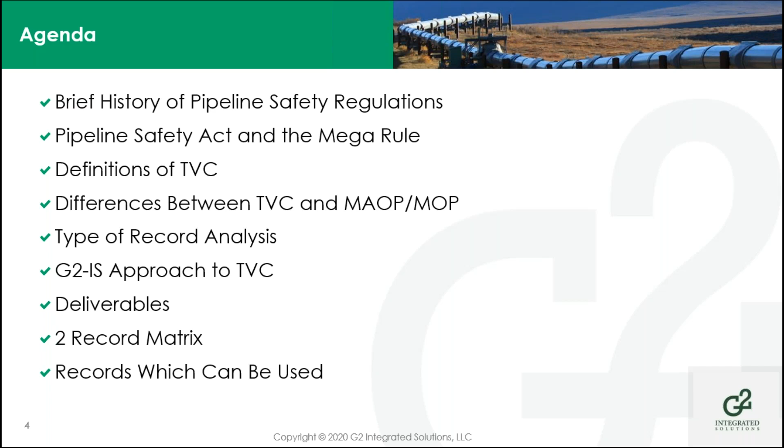So, want to go over our agenda. We're going to talk about a very brief history of the pipeline safety regulations and why we're where we're at, the Pipeline Safety Act and the mega rule. We're going to talk about TVC, and those differences between that and MAOP, MOP. We're going to talk about the different types of record analysis. Then we're going to talk about our approach to TVC, what a deliverable package would look like. Ultimately, we want to talk about a two-record matrix and why G2 does what they do, and then we'll talk about which records ultimately can be used to generate a TVC type of document.

And I'm not going to read everything, but we will go over it. Most people are familiar somewhat with why we got where we've got, and most people are familiar with the mega rule, but there are some interesting bits of history that I did want to go over.

The Natural Gas Pipeline Safety Act was adopted in '68 as a result of several things, but the last thing was an explosion on a gas leak from a cast iron main outside of Marting Arms, where the report showed that there were over 55 gas leaks, 7 of which were exceptionally large in the days just before the explosion.

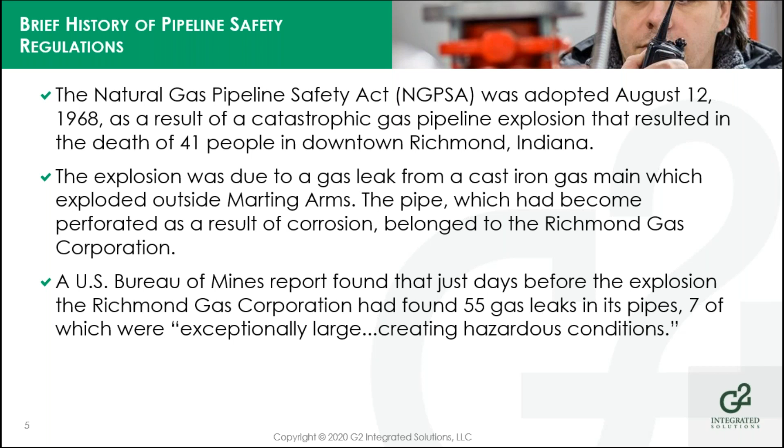In November of '68, the OPS issued the new regulations for gas pipelines, Part 190, which ultimately evolved into 192, 191, and 195. In '69, Part 195, the liquid lines, hazardous liquids by pipeline, was adopted. In '70, they adopted Part 192.

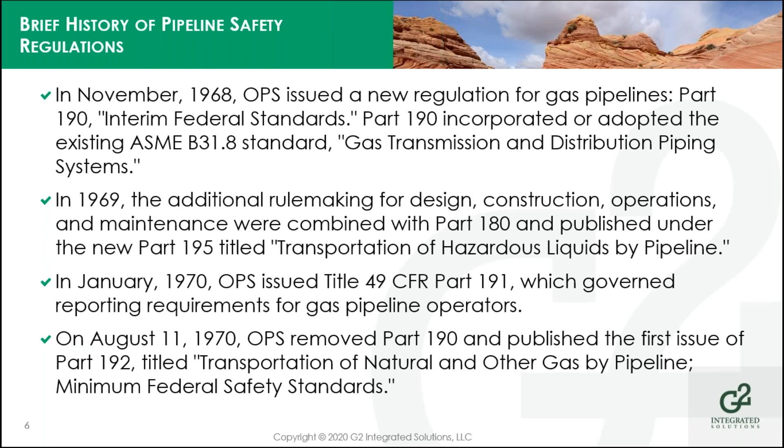And as we went from 1970, which was when the rules were initially promulgated, there were several things that happened, but ultimately, the defining moment for a lot of us, at least within the TVC world, was the San Bruno failure, where a 30-inch line ruptured inside the residential area of San Bruno. It killed 8 people, released almost 50 million in natural gas, and destroyed 37 homes. Fire destroyed 37 homes and damaged 18.

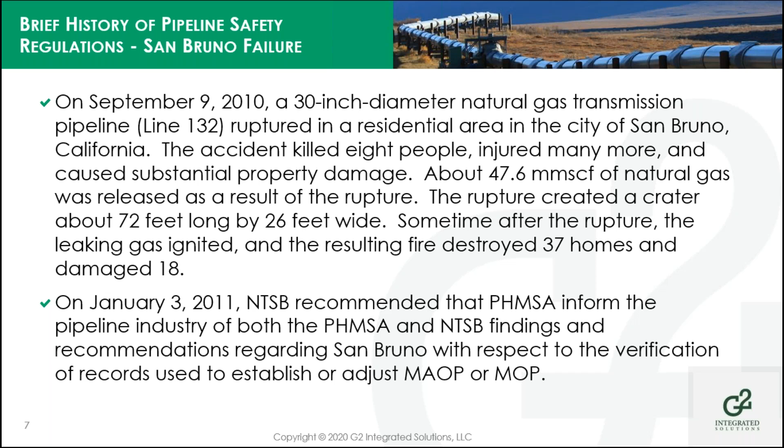So shortly after that, the NTSB recommended that PHMSA inform the pipeline industry of both the findings from NTSB and PHMSA and those recommendations regarding San Bruno.

And then with respect to the portion that failed, PG&E used available design, construction, inspection, testing, and other related records to calculate MAOP, which is exactly what we wanted to do. I mean, that was within the rule. That's the extent of what you're trying to do.

But what they found was that the records were incomplete, the records were wrong. For instance, there were areas on the alignment sheets that marked pipe as seamless that actually was shown to have a longitudinal seam welded pipe.

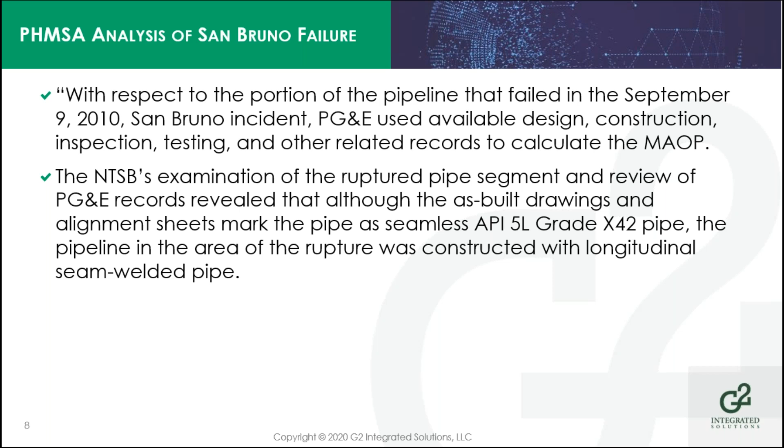Additionally, the pipe segment had 5 sections of pipe, some of which were short pieces, different types of seam welds, and it was unknown to PG&E and the design guys who were calculating the MAOP. They were using either wrong information or unknown information.

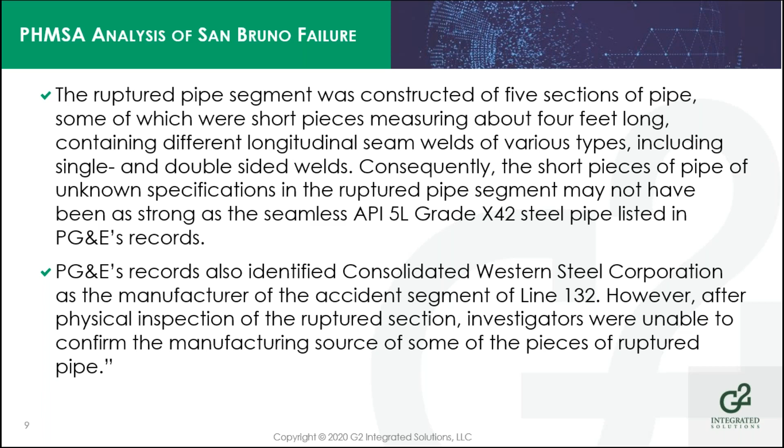And then the last thing is, the manufacturer of the pipe was shown, but they were unable to confirm that source.

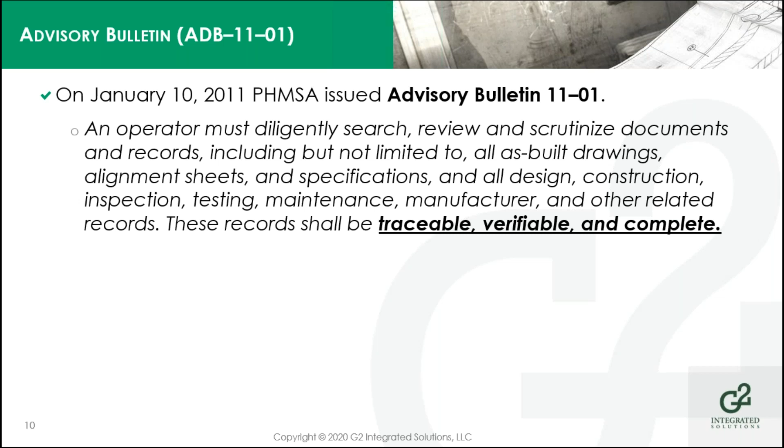So on January 10th of 2011, Advisory Bulletin 11-01 was issued, and particularly what it said is you've got to search for records and that your records should be traceable, verifiable, complete. This is the first time that term actually officially appeared in the documents.

Later on, because they didn't really define what TVC meant, they followed it up with Advisory Bulletin 2012-06, which gave the definitions of what traceable, verifiable, and complete really mean. It also stated that within the gas pipeline world, these guidance documents were required for class 3, class 4, and anything in an HCA.

Later on, as it evolved, because of the disasters and some other things that happened, the 2011 Pipeline Safety Act required the Secretary of Transportation to require the verification of records. Over several years, it's known as the mega rule. It took between administrations, many public meetings, and cussing and discussing at the highest levels of PHMSA and a few other organizations.

In October of 2019, the mega rule, at least with regards to traceable, verifiable, and complete within 192, were finally issued.

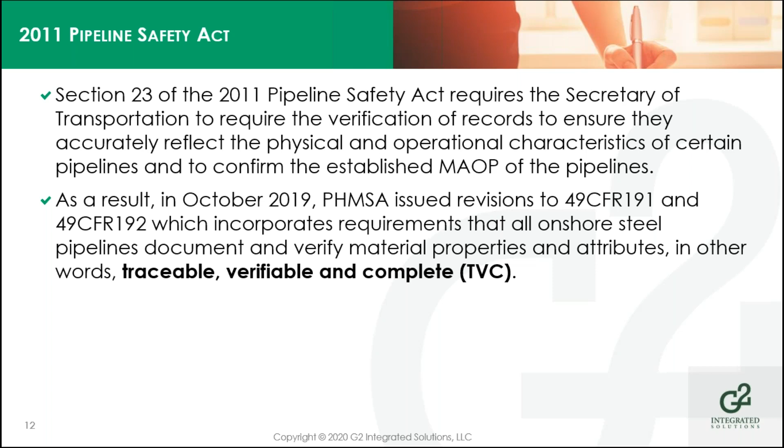Some of those sections that were part of the new mega rule that reference TVC are 67, 127, but the primary two are 607, which is where the TVC information specifically comes into play, and 624 comes into play if you can't find enough TVC documents to validate your pipeline. You will have to come in and reconfirm all your MAOPs on all your lines that you can't do TVC records on. So that's a pretty significant code section as well.

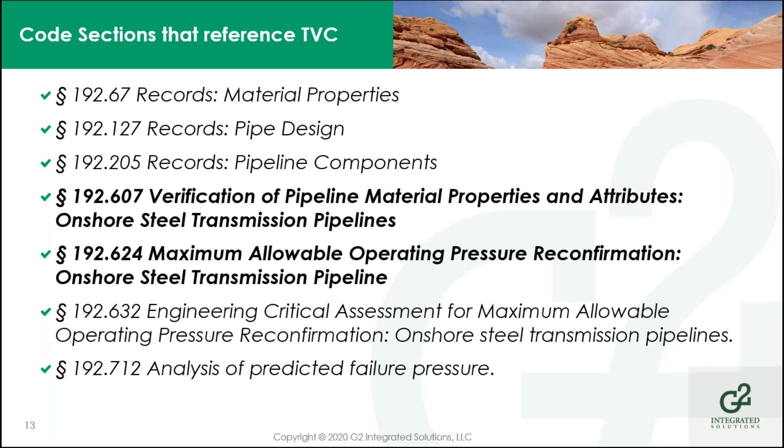In 127, it says if an operator does not have records to establish the MAOP, then you're going to be tied into 624.

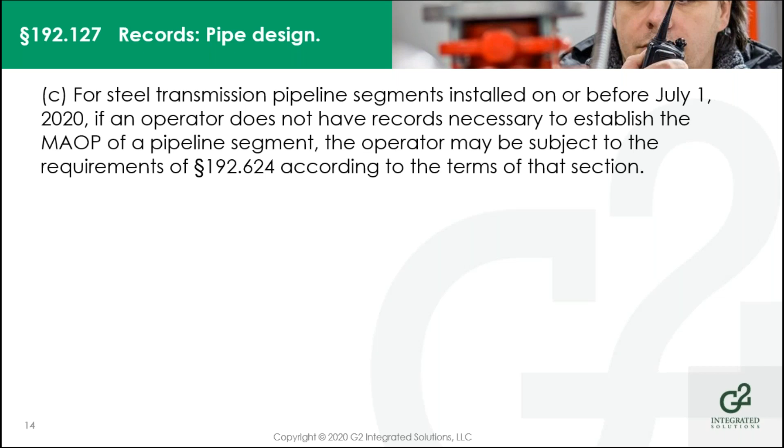607 says that you must document and verify your material properties and attributes. Those records have to be maintained for the life of the pipeline, and they have to be traceable, verifiable, and complete.

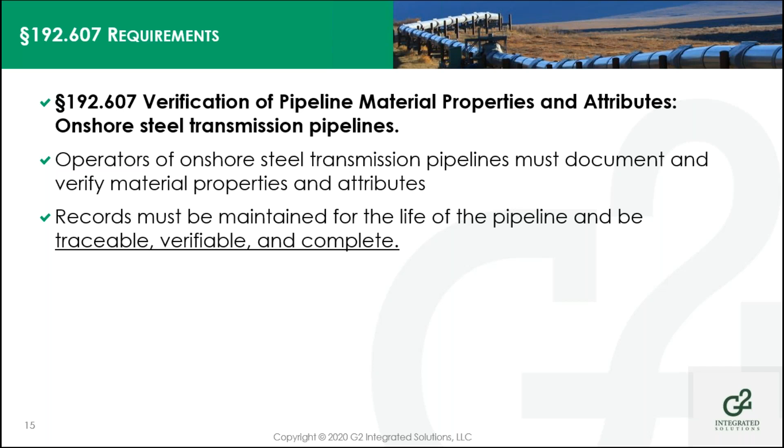Within 607, the 4 attributes that we do use to calculate MAOP are diameter, wall thickness, seam type, and grade. But now they've added some additional requirements, which is ultimate tensile strength. You've got to have your pressure ratings for your valves and flanges. And in instances, you're going to have a Charpy V-notch as well within your record sets.

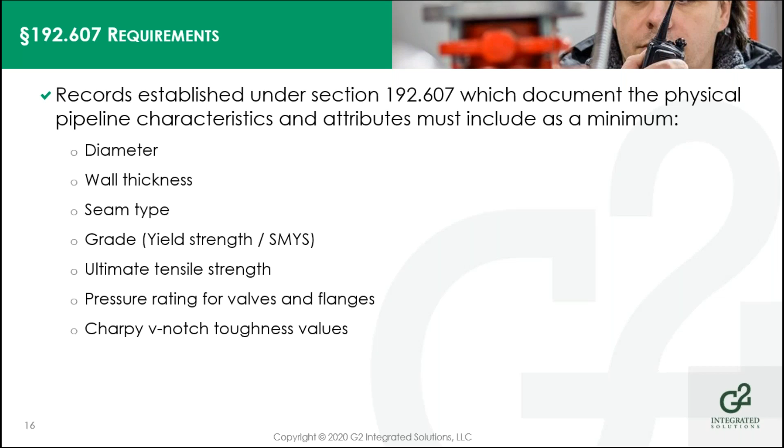A large part of all this information is available on an MTR, but an MTR by itself, while a really good record, is not an all-be-all record.

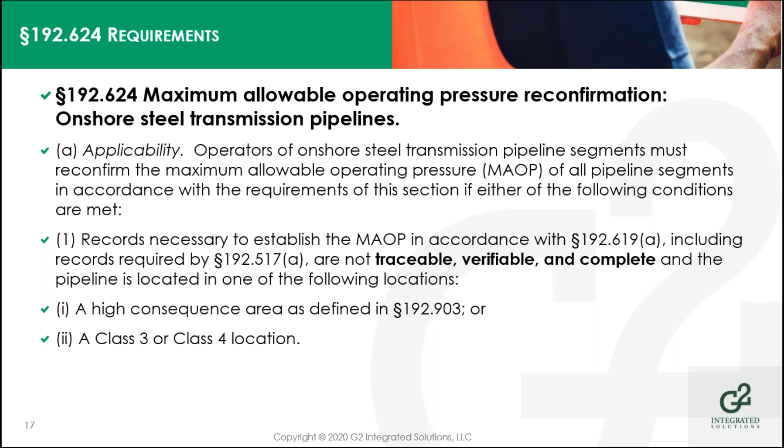624 requires that if you don't have traceable, verifiable, and complete records within a high consequence area or class 3 or 4, you do have to go in there and reconfirm all your MAOPs. And this is where they've also added the moderate consequence area, which was a new area per the mega rule, and most of you guys are already aware of what the MCAs are.

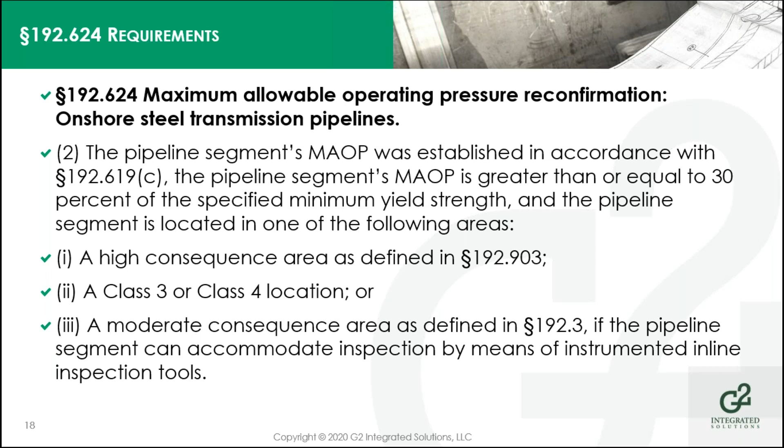Traceable records are those which can be linked to the original information about the pipeline, segment, or facility. They would include such things as mill test records, purchase records, as-built documentation, which would indicate the yield strength, the seam type, all the 4 attributes.

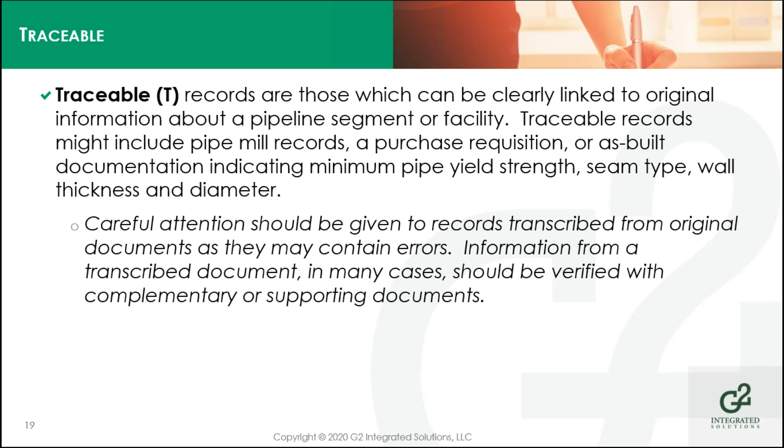And they did have a caveat here that you want to be careful. You've got to pay careful attention to those records that were transcribed from these original documents, because they might contain errors. They've added in that information from that transcribed document should be verified with the complementary supporting documents. They didn't use the word shall, they used the word should, which is not quite as strong, but it still carries a lot of weight.

Verifiable records are those which you can confirm by other complementary but separate documentation. So these would include contract specs, purchase orders, with the pipe specs.

And then they did bring in a caveat here on an affidavit, that it only can be used as a complementary document. It should have been prepared and signed at the time of the test or by an individual who had reason to be familiar with the test or inspections. I have seen some of these, where we've used them for things such as fittings, where we had an affidavit saying it met all the particular requirements, signed by an inspector at the mill or whatever, but it wasn't a true MTR. Some other places we've seen affidavits where it's 5-10 years after the fact, where the guy was on site and said, yeah, I witnessed this thing and it was installed according to Hoyle, but that's really not going to ever fly.

It carries no weight with the PHMSA inspector. So be very careful on using affidavits.

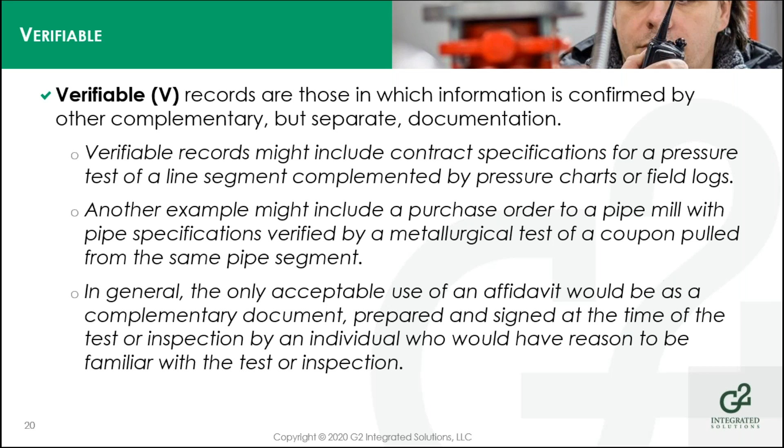Complete records are those in which the records are finalized as evidenced by a signature, date, or appropriate marking. The example given here is a completed pressure testing record that basically identified the whole range of information needed to validate a test.

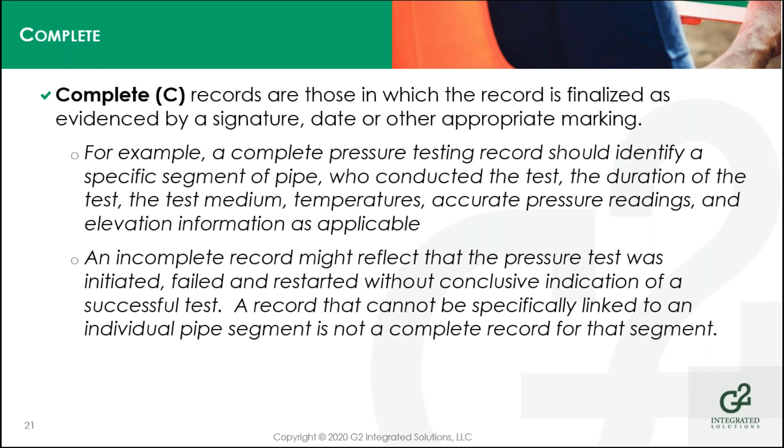I do want to comment here, the requirements in 192 do not, if you only followed what was in 192 for a test, you cannot claim that that's a complete test. It is missing certain requirements and information that would get you far enough down the line to say it's a complete test. 195 has better rules and guidance within it, and B31.8 also has a lot better guidance on what would constitute a complete and correct pressure test. So be aware of that. Don't take the 192 rules and think that's gospel to get you toward complete.

We do have one other definition we use here at G2, and we call it an original source document, which is kind of tied into all three of verifiable, traceable, and complete, but it's directly connected to that pipe, joint, valve, or other pertinent item. So you would see a mill test report, signed - and that's an important word - signed delivery ticket, weld maps, inspector survey notes, and even redlined as-built drawings. A redline as-built drawing at least says somebody was there, witnessed, and put their John Hancock on that particular drawing, which carries a little more weight as an original source document than an as-built drawing that's already been issued and signed.

And a document that is transcribed from an original source document would not be considered as an original source, but it could be considered as a quality document nonetheless, because it's based upon original source documentation. That would include any as-built drawing, alignment sheets, facility drawings, station drawings that are based upon transcribing all the information off an MTR, survey notes, red lines, as-built drawings, weld maps, whatever you would find within the various bands of an alignment sheet, for instance. That would not be considered an original source document, but it's based upon original source documents.

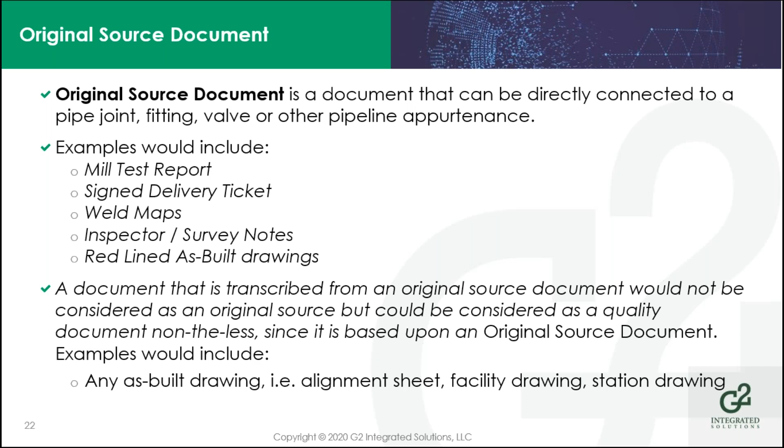And then the last one we want to go over is single quality record, which I think has been abused at times, and has not been used near enough at other times. AGA asked PHMSA, can a single quality record be used? PHMSA's response was a single quality record can be traceable and complete as evidenced by appropriate markings. I mean, that'd be acceptable. It would help establish TVC, but operating companies should be very cautious when determining whether a single record can be used or whether you should just identify a records gap and go look for additional information.

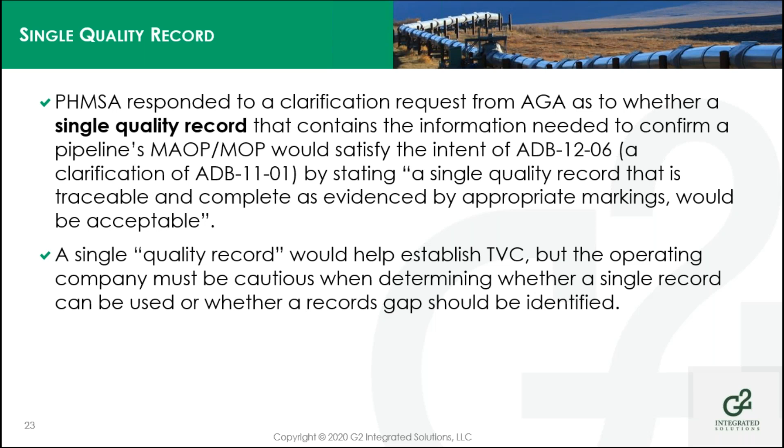This is additionally part of the definition PHMSA put forward: in those cases where a single material record may exist, a detailed and time-consuming research effort would be required to conclude that it can be considered a quality document. This step should only be considered after every other avenue has been exhausted, and you may require an experienced engineer, not somebody who just started one or two years out of school. You're going to need somebody that can complete a white paper to document the results and give you a better indication of what that is.

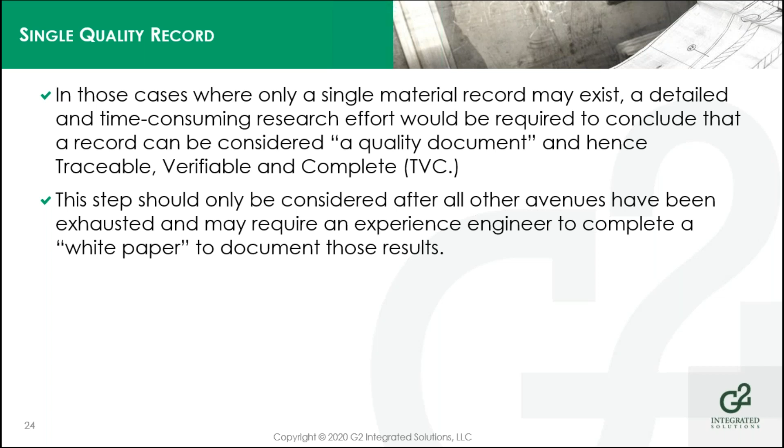G2's position is that for a single quality record to be considered, these characteristics should be included: the document itself must be considered a post-construction document. Documents issued for review or issued for bid would not by definition be considered post-construction, and most IFC documents would also not be considered post-construction. The operations team must believe that the document accurately represents the pipeline and uses the information contained as fact. All of these have to be included. As we saw earlier at PG&E, they believed the alignment sheets were fact, but not everything else was there.

The document should include any revisions to the pipeline, such as reroutes, replacements, repairs. They need to be signed and dated by a company representative. And the other important one is the document has to spatially locate the information. So not every document that you have that would maybe be single quality can get you to a point where it's spatially located. And then we have a note: the nearer to the actual construction the document is, the more likely it contains accurate information, which again gets back to the statement about...

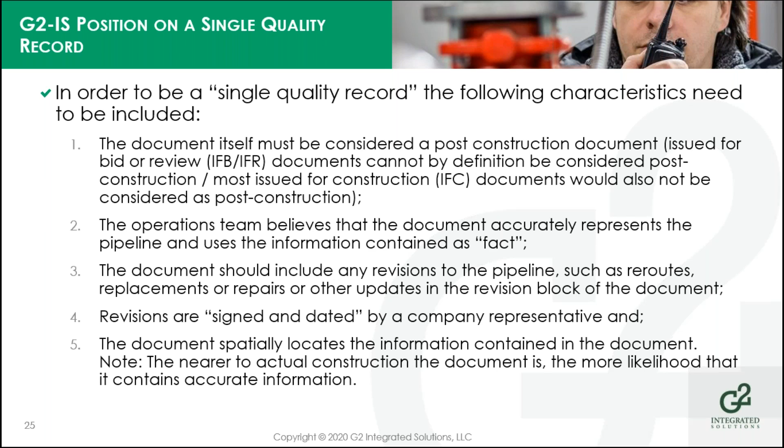Based upon our experiences, only appropriately updated alignment sheets and our documented pressure test reports could be, as a general rule, meet those requirements. Not all alignment sheets, not all pressure tests can meet this standard.

Some alignment sheets show revisions but aren't signed. Some of them don't show any revisions at all. They may have been accurate at the time they were first produced, but there have been other changes, reroutes, so the alignment sheets aren't always updated.

And again, not all pressure tests would identify the section of line or fabrication that were tested. So now you've got an interpretation as to the actual test section, or you've got to do further research for additional records.

And again, all of these should be considered - you should only start looking at this single quality record step only after all other avenues have been exhausted.

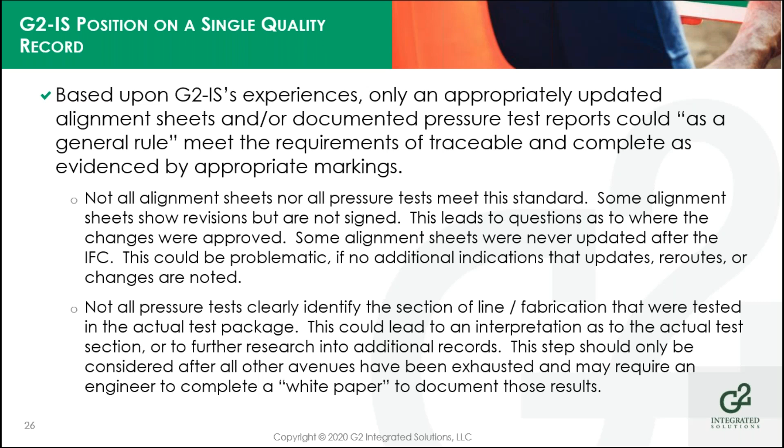The best result obviously would be to find complementary records as defined by PHMSA, but we all know that for many of the older pipelines, those don't exist.

So the single quality record would help establish TVC, but be, as we've stated earlier, very, very cautious when you are determining whether a single record can be used or whether you should be reporting that you have a records gap. It doesn't prevent you from essentially calculating MAOP, but it's not going to fulfill the requirements of 607, so it may throw you over into a 624 environment.

And you've got other rare cases where other documents are available that could be considered as quality - the as-builts, the red line sketches, log books completed during construction by the site inspectors. These can be very, very good records.

If that's all you've got, a red line for that specific area, you could maybe make the case that that does conform to a single quality record. But if they've already made it onto alignment sheets or site drawings or whatever else, then these would be at best considered a complementary record to the other actual documents you're using.

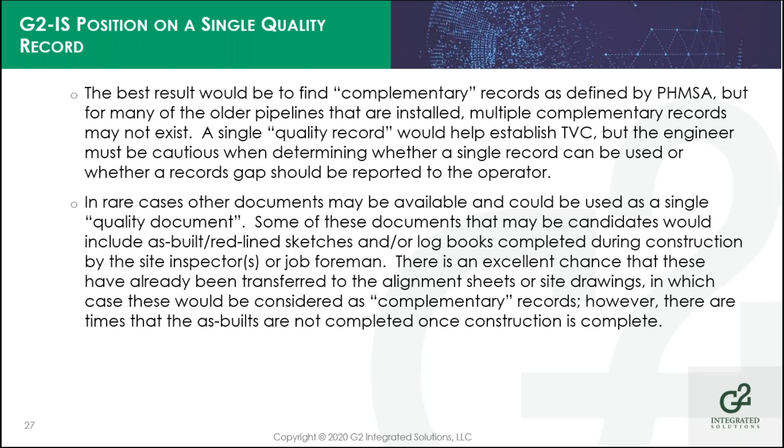What is not a single quality record? We've talked about MTRs a little bit. They're wonderful records - they contain OD, wall, seams, SMYS, ultimate tensile strengths. They'll give you a lot of information, but it's not a standalone document because nowhere does it identify where on the pipeline that particular piece of pipe, that joint, is located.

Material receiving reports, weld maps, foundation, fabrication drawings that do not spatially locate the pipe or component also could not be considered as quality records.

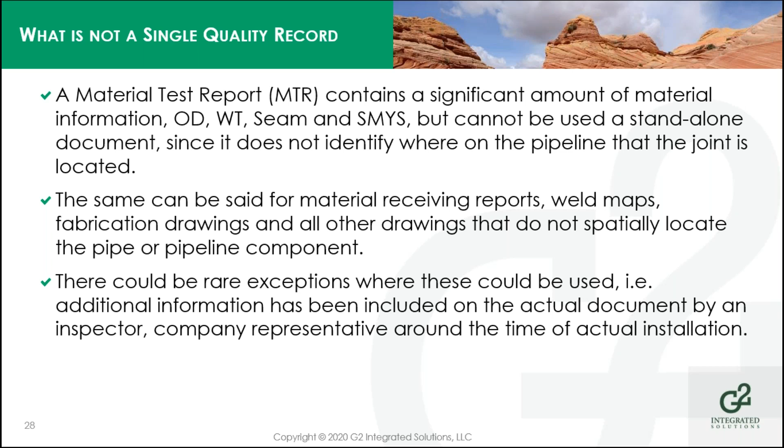There are some rare exceptions. Again, somebody wrote on a pipe - from milepost 7 to milepost 10 - for an MTR when they were stringing pipe, then that could be considered a single quality record because you did spatially locate it. But that's a very rare occurrence, if any of you've ever seen it.

One last thing to go over: in the past, a lot of us, when doing the math to calculate MAOP and MOP, used default values. They get you down the road, they get you where you can calculate MAOP, but the new rules aren't going to let you use a default value and say it's good, and that I've met 607, I've got TVCs. It's not going to let you get there.

So yes, use default values where necessary, but continue your research, because at some point the feds are going to start asking those questions: why are you using that? Default values are not popular within the organizations anymore, so just be aware of that.

As we said, we just made another reference to 607 - it requires the operators to have TVC records. So in order to do that, you've got to develop and implement procedures for conducting non-destructive tests in order to help verify those.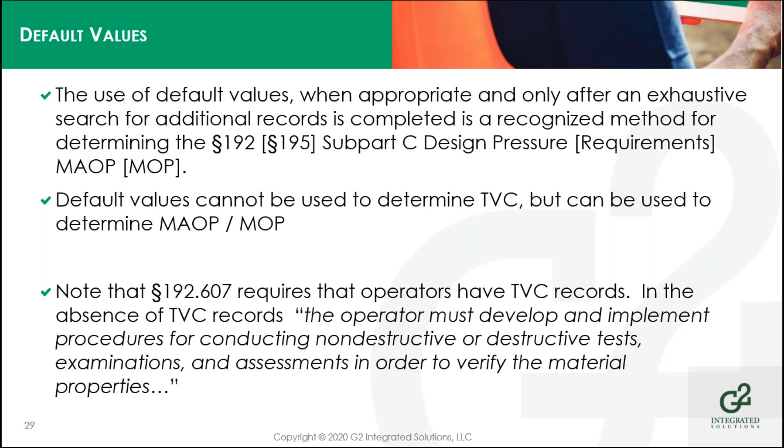So while default values will get you to where you can calculate MAOP, the code is still pointing towards you to go do additional testing and additional research to get that information done.

I just wanted to comment, because at one point we all used to use, at least in my experience, MAOP and TVC very loosely - we used them interchangeably. If we got MAOP, we got TVC, and vice versa. The mega rule changed that completely.

TVC was never officially mentioned prior to the guidance documents after the San Bruno disaster. They do indicate that determination of MAOP should be supported by records that are TVC, which is what 607 has now done - they've codified those guidance documents into the new rules.

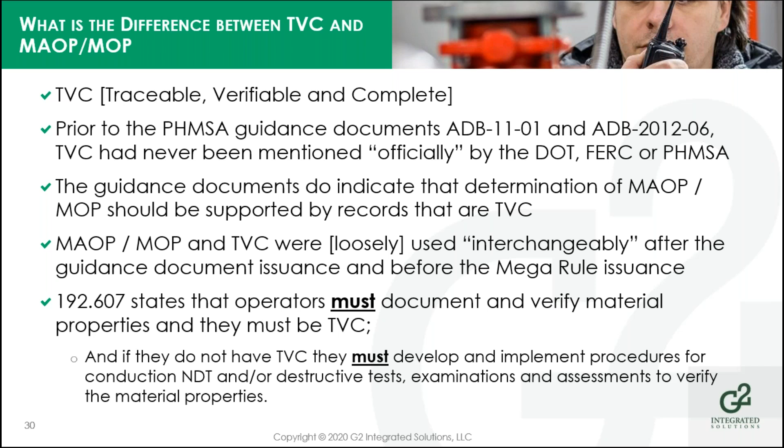All pipeline components are also required to be TVC. That was always in the code, but TVC was kind of out there because of the guidance documents, and there were some companies that never really fully TVC'd everything they had on their systems. That's been removed from consideration by the new rules.

You have to validate all of your pipeline components, and that's what 624 comes into play. If you can't TVC them, then you're going to have to reconfirm the MAOP, and that means everything - valves, fittings, pipe. There are no exceptions to the rule anymore.

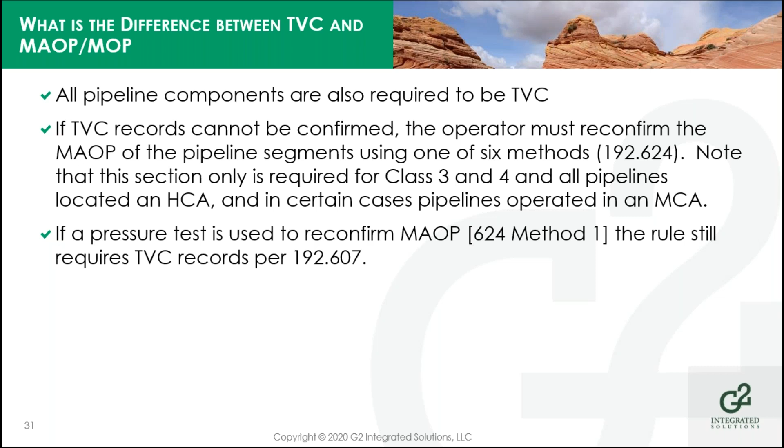I saw one question early, and I'll fill that in now. Launchers and receivers, if they hold pressure at all, are going to end up being underneath that same rule. Don't ignore those. At times we would say, hey, if the pressure ended at the isolation valve and you don't see anything until you get the pig in place, you might be able to make the case that that's not part of it. But anything that sees pipeline pressure at all is going to be included within these new rules.

So what is the difference between TVC? The records that you use to calculate MAOP or MOP - hydrostatic test records are used to support the A2 calcs. A hydro test won't, by definition, validate all your material properties.

And then ultimately, the scary one of all, the spike test, can be used to determine the yield strength. Historically, most operators shied away from this because the way it was always framed, you took the pipe to the plastic limit - nobody wants to do that, taking it to where the thing basically fails and then you hope it comes back. They changed that definition a little bit in 506. So if you were always hesitant about doing a spike test, read 506.

They've given you a little bit of an out and taken it to yield. You can define what your pressure would be, take it to there, call it a spike, and you're good to go. But understand, you have defined forever what the size of the pipe is, regardless of whether you find something later on.

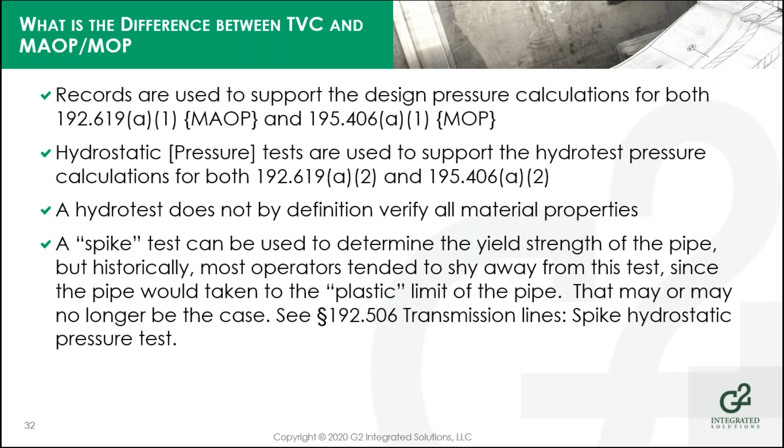There are several methods used to determine TVC. We'll go over some of them, and then we'll go over what G2 typically likes to use. Now, we have done all of these, so it's not that we're opposed to working with anybody on doing any of these things - it's just we feel like there's possibly an improved way to do it.

For instance, grading - in grading, you assign a numerical value to each different type of record. You may call an MTR a 10, an alignment sheet a 5, a PO a set, a 2, whatever you want to call it. Then there's some minimum value that must be obtained before you could call something TVC. So if you have a 7 and a 4 and your minimum grade was a 10, you'd say, okay, I got enough here to call it TVC.

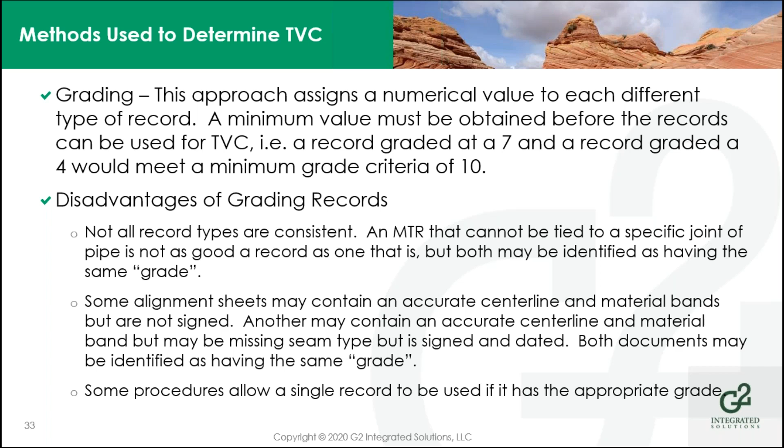Another type of method is using grading records, calling them tiers. It's similar to grading, but what this does is you evaluate a record, and it may go into a tier 1, it may go into a tier 3, depending on the information contained within it. So it's a little better than just grading a record, but it has many of those same disadvantages.

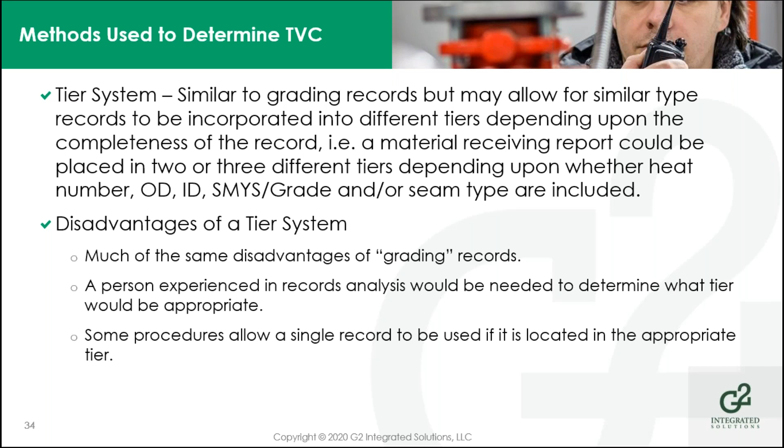You still would need a person experienced in records analysis to determine whether a record goes into tier 1, 2, 3, or 9, and it also gets you back to that same kind of deal - a single record could be used if it falls in the appropriate tier. But again, I would highly caution you from automatically defining something as a single quality record based on an arbitrary designation, whether it's a grade or a tier.

Not all similar record types are created equal - this is why we don't recommend grading records. I've kind of gone over this already. An MTR is either great or it's useless. If you don't know where it's gone, if you don't know that it actually is part of the pipeline, it really can't be used for anything other than, you'd like to have paper on the shelf.

So be very aware of MTRs, and if you can't tie them to the pipe - whether it's through a purchase order, through weld maps, or I've seen really good receiving reports that do tie MTR and heat numbers to joints of pipe and then when it was strung - that makes it a great record. But again, be very aware that an MTR is not always the greatest record in the world.

Alignment sheets can be extremely detailed, but they can be pre-construction, they can be red line, they can be as-built. We've even worked with clients that only had basically a construction document showing the centerline. Well, that's not giving you anything other than, hey, the GIS guys may like it because they can put it into their system, but they have no information to tie to it.

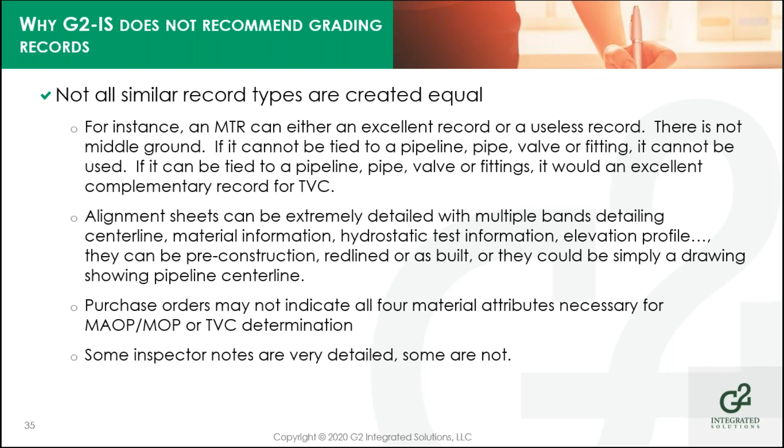We're going to move into our approach to TVC. We like to use a 2-record matrix approach and then utilize a thing called a PFL, a pipeline feature list. It's a rigorous, systematic approach to record analysis where we go in and identify and spatially locate every foot of pipe and determine whether the 4 attributes necessary to calculate MAOP are available. We look at all 4 attributes individually, so there could be times where we would have 4 different record sets in order to calculate the 4 different aspects of what you need for TVC. It's very rare you'd ever have to do 4 different record sets.

The one thing we typically see missing a lot of times is seam type, especially in the older records. And sometimes you won't necessarily always see grade, because there are other places you would have to go to find that within the records approach. It defines a series of record type combinations that are viable for the validation of the various data attributes.

These record type combinations are a discussion between G2 and the customer, and a very good understanding of those records that are within their system that they use daily to do the work they need to do. We do understand that gaps exist, but by helping to implement this methodical approach, we may be able to find one, we may not be able to get both. It may require us to go do additional record searches, or different record combinations in order to help do that.

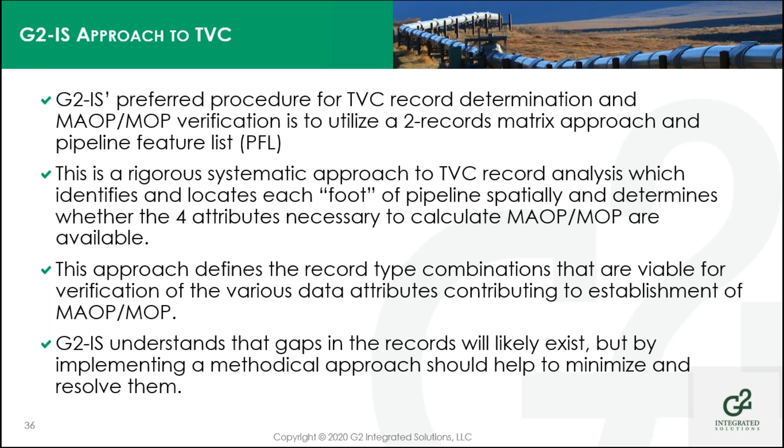But it's a very detailed, very structured approach to getting it completed. It has the advantages of minimizing those volumes of records that need to be reviewed in order to identify TVC for any feature between pipe, valves, and fittings.

It helps minimize the number of repeat visits to customer facilities. We may be able to find a record combination that is kind of out of the ordinary, but it does meet the requirements. It gives us the two records that are needed in order to validate a particular attribute. It's a systematic, repeatable method. It ensures that complementary records are used, and it eliminates the need to grade records.

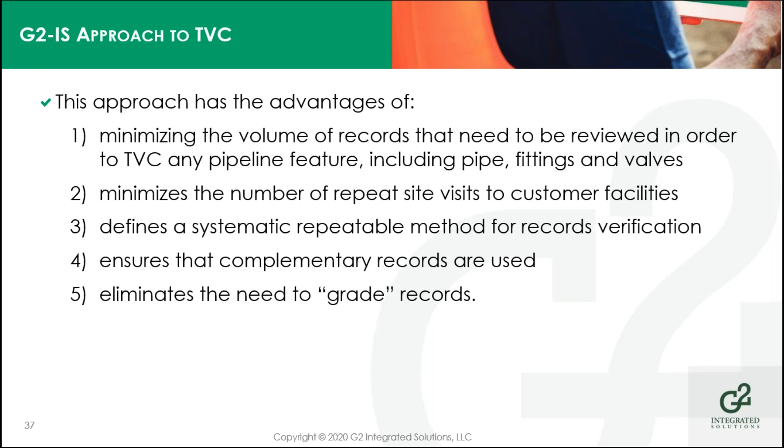It establishes this particular combination of material and pipeline records to help get us where we need to get. It ensures that any two records used are complementary and separate records, and it gives you a confidence level for completeness that the single approach could never achieve. It's a rigorous and more reliable definition of TVC because of the adoption of the matrix, and it's a repeatable function, so you don't have to have as experienced a level of person to help get you there.

One other thing we do have here is we also prioritize those records that we need to evaluate first. So if there are a series of records that are used day to day - alignment sheets, purchase orders, MTRs or whatever - we would prioritize those as the first records we look at to help establish where on the matrix you would go. And then if you don't have all of that, you start walking your way down the list.

We have at times updated our thinking and our procedures. Sometimes it would be the first two records you came across that hit the matrix, you called them good and went on to the next one. That's not really the right way, because a lot of these records you guys want to use on a day-to-day basis, and that's how you want to establish your TVC. So we have prioritized the records we review, and then we follow the matrix definitions behind that.

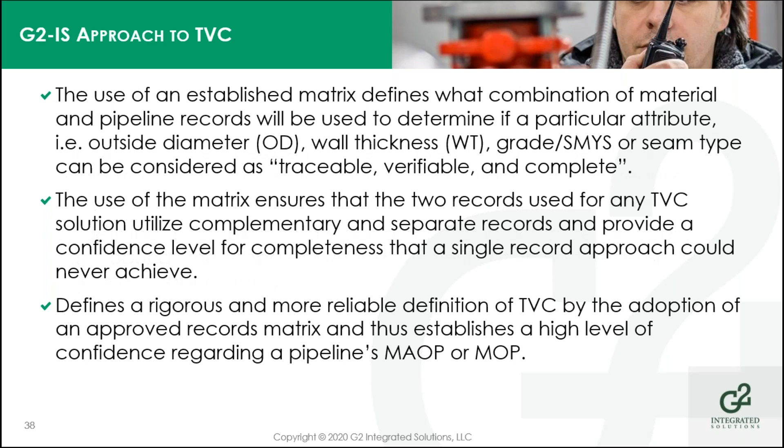Incomplete and partial records are not an adequate basis for establishing MAOP. That's from the guidance documents, which has now been codified by the 607 and 624 requirements. It requires defining record sets for each asset to be evaluated, and each operator usually has a unique set of available records to complete the analysis.

Now, they tend to all kind of be the same, but dependent upon the legacy of the pipe and the operator, different operators put a higher value on different records within their systems. By defining the complementary pair of records in advance, you can bound the scope and establish a consistent, repeatable process. You don't need as experienced people to help you get through the TVC approach.

So this is one of our outputs that we create, it's called the pipeline feature list. We go down foot by foot by foot as we build it. It's a great initial database for the GIS guys because it builds linearly - it's non-branching. It has a lot of information embedded into it. Now, the one thing we do is look at the attributes individually.

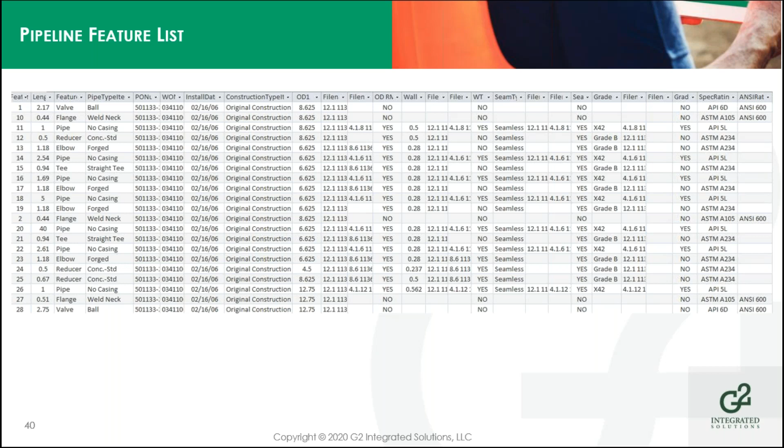We would report gaps. So as we go through each of the individual features, then we would start reporting, hey, we've got all this pipe, different types of pipe, we've got flanges, we got elbows, whatever. So then we just kind of identify where within the world do you have TVC.

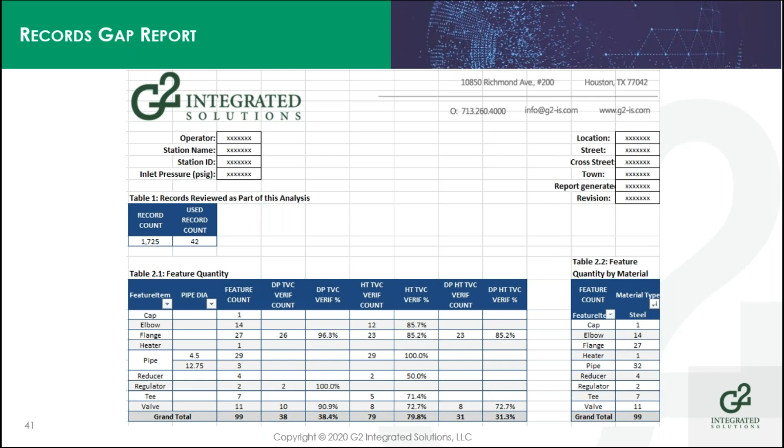And if you can see here, within flanges, we have, there were 27 flanges, 26 of which we were able to get a full-blown TVC on it. And then you look at it within valves, again the same thing. You had 11 valves, you had 10, but you didn't have anything on T's. You didn't have any, your pipe's a little bit squirrely on having any information on that.

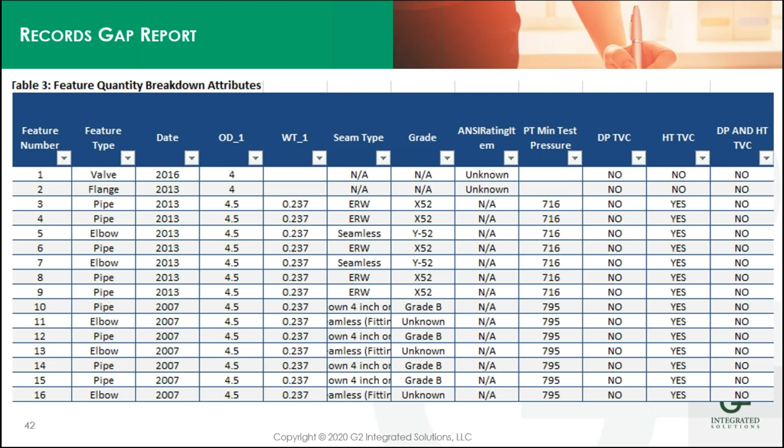And then this one here, as we go down, this is the individual. So as you go down line by line by line, this is how the pipe was built, the pipeline was built. And then we would again do the same kind of deal on what part of what line met the requirements and what part didn't.

So we're going to move into the matrix examples, and this is for us the bread and butter. Everything we do is we identify the records that are available per feature at the customer's level. And so we do start evaluating, and you'll start going checks. If it's got an X, that means that those two together would meet the definition of TVC.

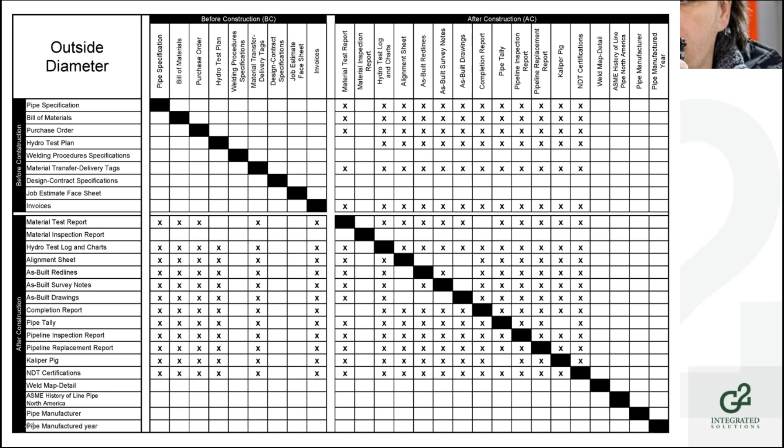We divide it into before construction and after construction, post-construction. Our personal preference would always be to start with the post-construction documents within a priority list and then start mating up those particular documents. So there are times you can have a post-construction document mated up with a pre-construction document, where you'd have an MTR and an invoice for instance. You could make that up to get a TVC. That may sometimes get you close to having it on a project, but it may not spatially locate that. So there are other documents you would need in order to spatially locate the particular document.

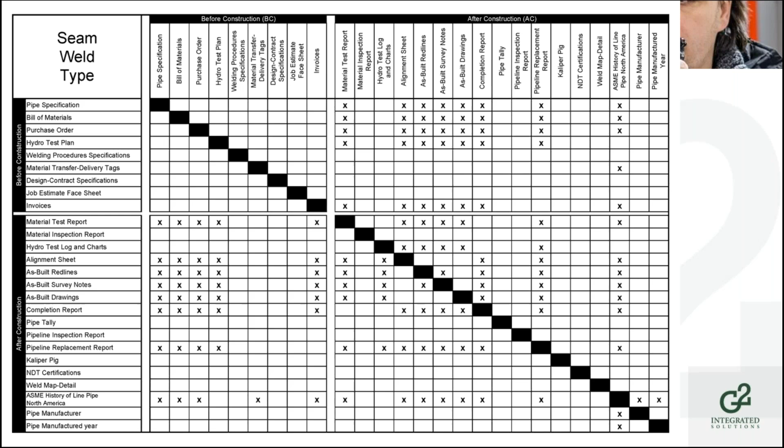And so we've got them for each individual one. We've got them for OD, we've got them for wall, we've got them for yield, we've got seam type, and we also have one on flanges, which is the same kind of deal, but it didn't make it in this slide deck. So we have the four that we originally generated for all the four attributes, again with flanges and valves. That's a newer requirement. We've been doing it for a while, but it is kind of a newer requirement for what you've got to do.

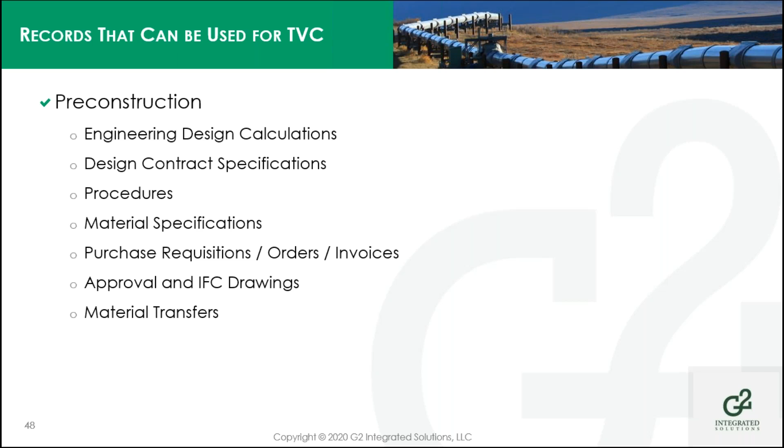So records that can be used for TVC, and you've seen them based upon the matrix: pre-construction documents, engineering design calcs, design contract specs, procedures, different material specs, purchase requisitions, orders, invoices, approval drawings, material transfer documents, can all be used within a construction document world. Pipe tallies, delivery reports. We have MTRs here because the trucker who's delivering your pipe should have these per API 5L with him and deliver those as part of the paperwork when you're signing off on it. The red line alignment sheets or drawings, joint location drawings or sheets, and a very important one here, GPS coordinates of each joint or weld.

That should be in everybody's current construction technologies, where you go out and get a lat-long on every weld or every joint of pipe. The guys that run the smart tools, the GIS guys, within that you should also, as part of that knowledge base, have joint numbers.

You should have all of the specific information. You should have the heat numbers, all part of that, which then ties you back to the perfect set of documents, which would be an MTR and a lat-long on it based upon this. So that should be part of your current technology, to stick every joint with a lat-long.

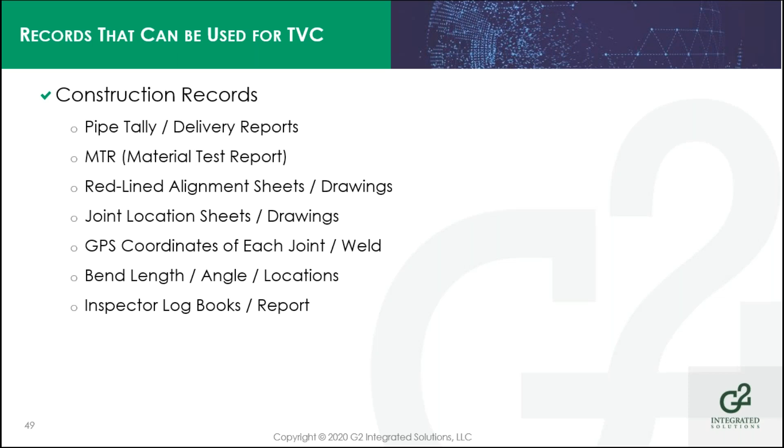The bend length, the angle, the locations, those kind of drawings, you see those all the time. Log books from inspectors' reports, some of them are excellent, some of them are not, but the really well done ones are extraordinarily important to have.

Other construction weld maps, your pup joints, where you located those, any NDE reports, they're okay. We typically try to shy away from them because they don't really tell you a lot of information. Sometimes they'll tell you OD. They should always tell you OD, but a lot of them may not necessarily report wall, and you certainly probably aren't ever going to see grade or possibly seam on those types of deals.

The hydrostatic and pressure test reports are obviously a very good record, and depending upon the particular company's outlook, these records can also be used for material records. We work with some companies where they certainly wanted to use them for material records because they had all the information on them. And some companies said no, we only want them used for hydrostatic tests. That's a company preference. We'll work with you any way that you want to work.

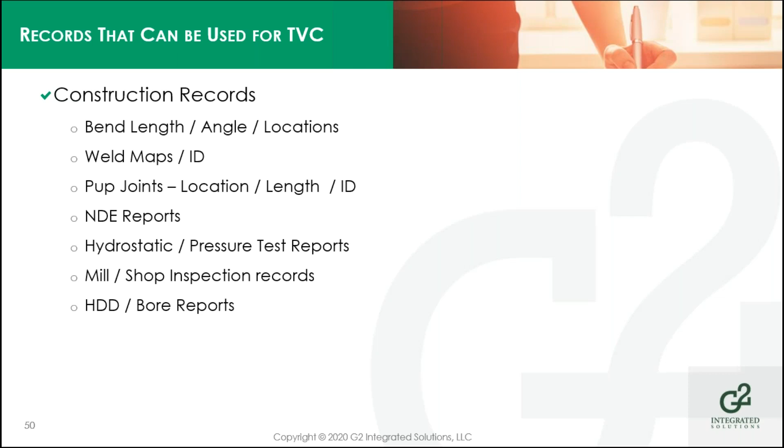There's mill and shop inspection reports, HDD bores, all those reports come into play as far as records you should be keeping, and that can be used, ultimately depending upon the details of them, for TVC. Some other records that can be used are as-built drawings, completion reports, job books.

Completion reports in particular, done right, and most companies do them right, that's the gold mine, the platinum standard for that, because all these documents that you need are all included within there. So it's a single source of information that you possibly could TVC your entire line if they're done right. So take great care and great pride in your completion reports, because done right it will help you get a whole hell of a lot farther down the road than some other ones.

Way post-construction dig sheets, valve inspection reports, pipe exposure reports, all of those are important to try to TVC. But, again, now with the new 607 requirements, some of these are actually going to be required to be part of your records.

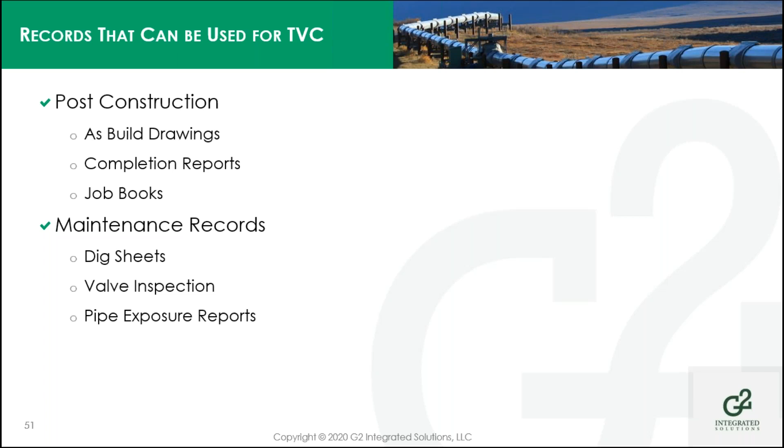And in particular, if you can't validate TVC now, a pipe exposure report is almost always going to be needed. Every time you've got to go do an exposure, or you need to go do an anomaly dig, you've got to take along a checklist to make sure you can validate all your piping materials while you have the hole open.

And then some of the final things we had on here: approved drawings, equipment drawings that have been approved, or even as-built from vendors or whatever. One thing that kind of gets lost a lot of the time is, not a lot of pressure vessels exist along the systems, but in places where they do, at stations and all that.

An ASME pressure vessel, if you have the code number, if you have the serial number, you ultimately, if you don't have anything else, you've got quite a bit. A lot of times you can go back to the manufacturer, or possibly even go back to ASME themselves and get all that information, because that is recorded, that is saved. There is so much information contained within what created that U1 stamp, so don't ignore the stamp on a pressure vessel as far as what could be used for TVC.

A couple other things I want to mention: flanges and fittings, by the way, if you use the B31 or the B16.5 standard, they're required to be stamped. They're going to have grade and OD and wall, all four of the attributes you need, stamped on the side of either the flange or the fitting.

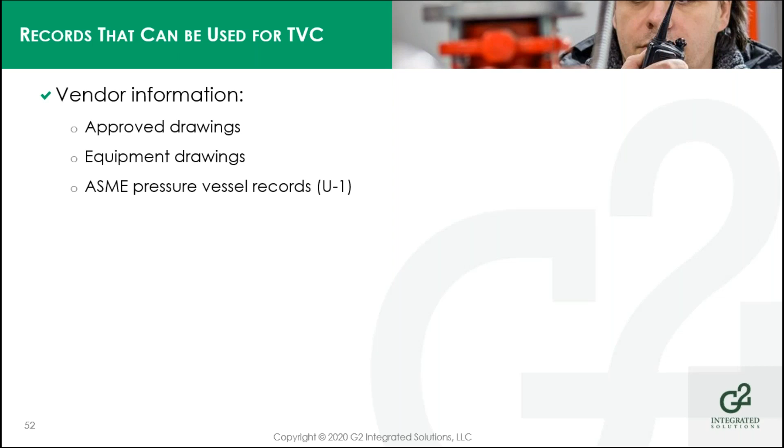Why is it important? At the end of the day, you have to tell the public what your MAOP or MOP is. You're using Barlow's, the modified Barlow's, and you need records to do all that. So why do it? Because ultimately it's about operating the pipeline safely.

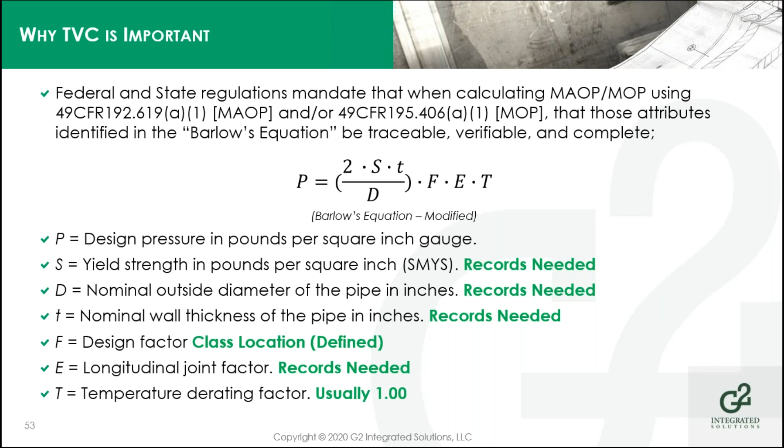As we've gone through all of this, there is finally one question you've got to ask yourself: what if we did nothing? What if we just said this is not important to us, we're going to blow it off? Ask yourself - what if we did nothing?